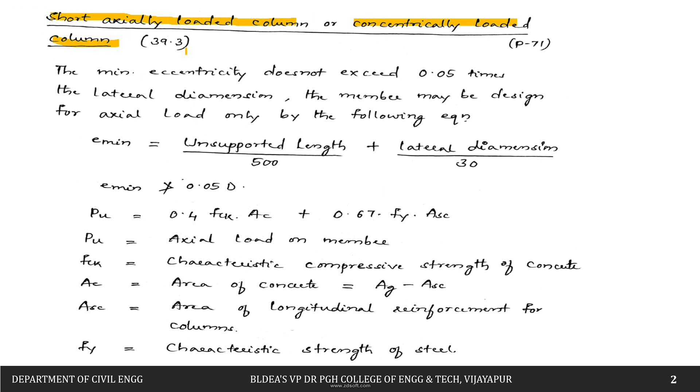So we have to check whether it is a short column or long column, that is L by D ratio. If it is less than 12, we can design it as a short column.

Next we have to check whether it is axially loaded with uniaxial or biaxial bending, or whether it is purely axially loaded. So we have to check that the minimum eccentricity should not exceed 0.05 times the lateral dimensions, that is, E minimum should not be greater than or equal to 0.05 times D. This is what the code says regarding minimum eccentricity.

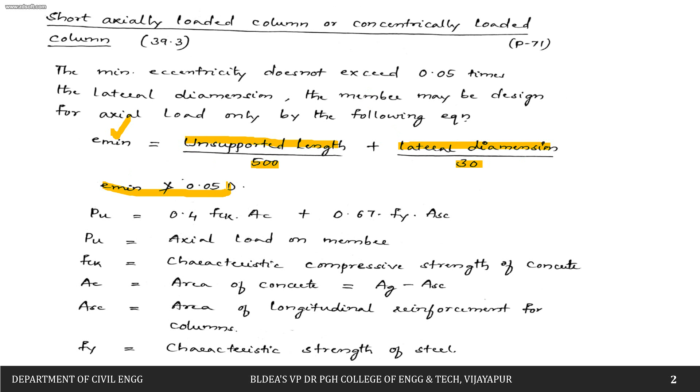So this E minimum is calculated using the formula: unsupported length L by 500, plus lateral dimension by 30. If this is satisfying the criteria, then we can design it as a short axially loaded column.

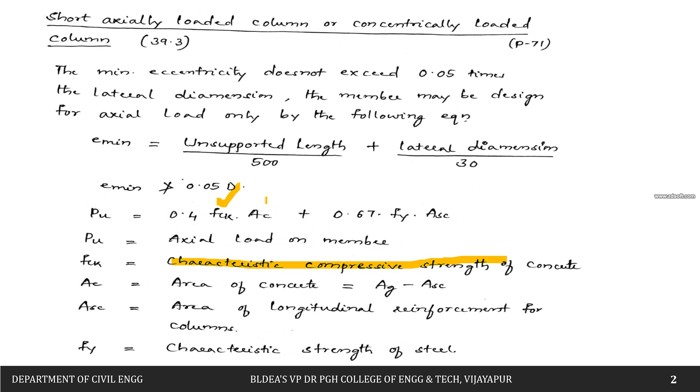So now this is the equation we are going to use to design a column: PU is equal to 0.4 FCK into AC plus 0.67 FY into ASC. So PU is nothing but the axial load on the column. FCK is the characteristic compressive strength of concrete. AC is nothing but the area of concrete.

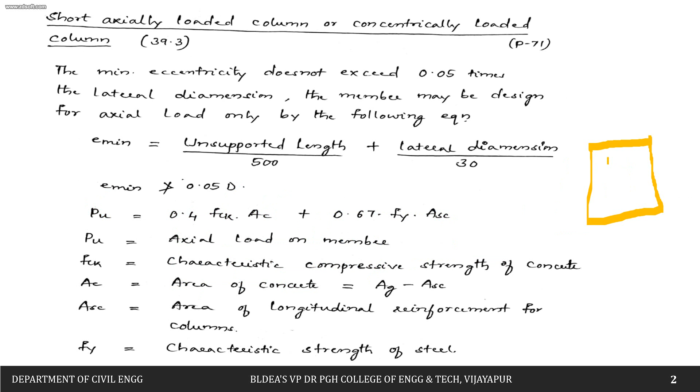So what happens is, if you see this concrete column, I am showing you the cross section. Here we are going to provide the reinforcement. So this has to be deducted, and the value we get will be the area of concrete.

So how do we calculate AC? That is nothing but the gross area minus the area of steel. ASC is nothing but the area of longitudinal reinforcement for the column, and FY is nothing but the characteristic strength of steel.

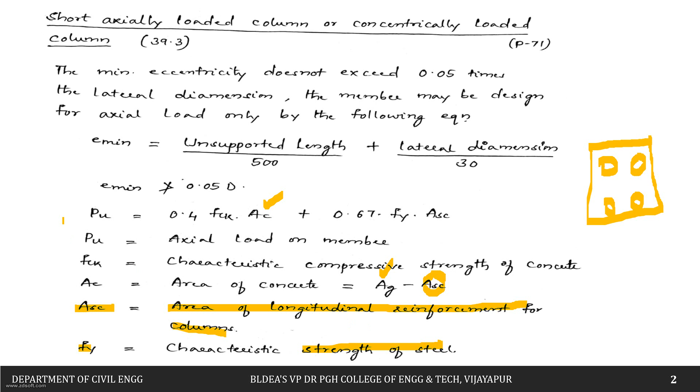So with the help of this formula, we are going to design a short axially loaded column. So let us try to solve one problem.

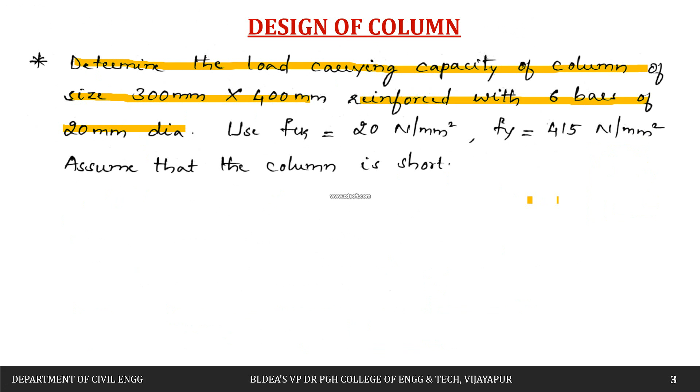Determine the load carrying capacity of a column of size 300 by 400, reinforced with 6 bars of 20 mm diameter. So they have given one column of size 300 by 400. For example, this is 300 and this is 400.

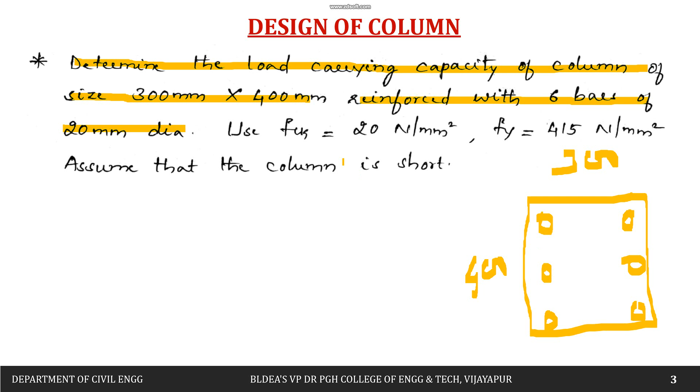In this column there are 6 bars of 20 mm diameter. This is bar 1, 2, 3, 4, 5 and 6. Like this, size is 300 by 400, and in between there are 6 bars provided. Grade of concrete is FCK equal to 20 and FY equal to 415.

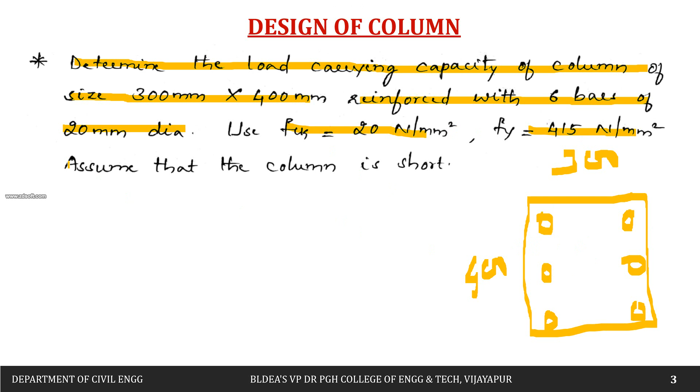So if this is the section and this is the reinforcement, what is its load carrying capacity? That means how much load this column can take. Assume that the column is short. So let us try to solve this problem now.

First let us calculate the area of steel. They have given 6 bars of 20 mm diameter. So pi by 4 into d square, this is nothing but the area of 1 bar, multiplied by 6, gives us the total area of steel, which comes out to be 1884 mm square.

Next is the gross area of the column. They have given size of the column as 300 by 400. If you multiply, we get the gross area of the column, that is 120000 mm square. Then we can calculate the area of concrete, that is gross area minus area of steel, which comes out to be 118116 mm square. This is nothing but the area of concrete.

Then next we can use this formula to design the short axially loaded column, that is PU is equal to 0.4 FCK into AC plus 0.67 FY into ASC. So FCK is 20, AC is just now we have calculated, plus FY is 415, AS is 1884.

So load Pu comes out to be 1468.77, this will be the factored load. If you want to calculate the safe load coming on the column, you have to divide it by the factor of safety, that is 1.5. So 1468.77 divided by 1.5 gives us 979 kilonewton. This will be the load carrying capacity of the column.

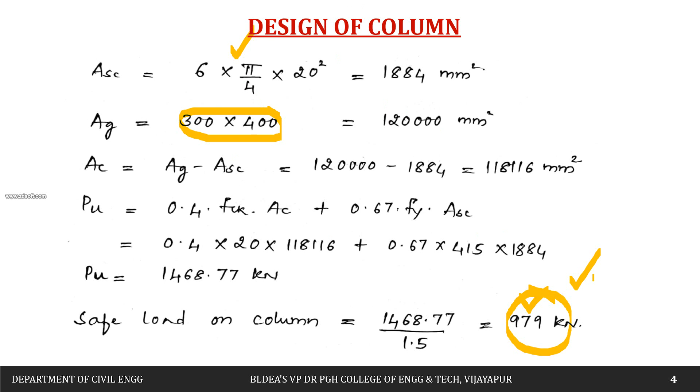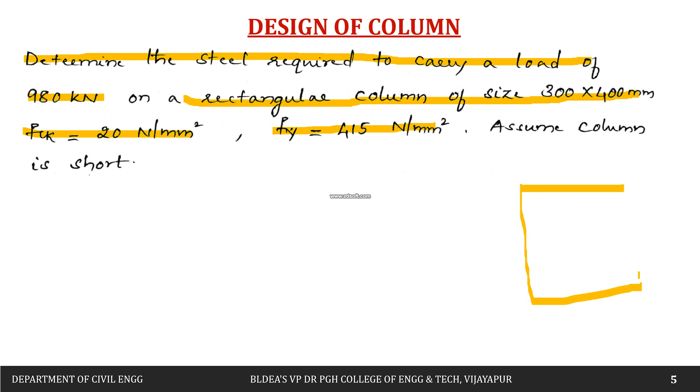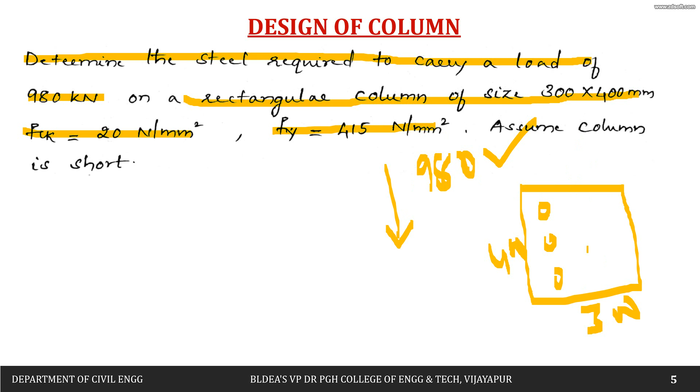Then next, let us try to see this problem. Determine the steel required to carry a load of 980 kilonewton on a rectangular column of size 300 by 400. FCK is 20 and Fy is 415. So here we have one column of size 300 by 400, and the load coming on this is 980 kilonewtons. So what is the steel required, means how much steel I have to put in this column. We have to calculate this.

Assume the column is short. So this is the equation: Pu is equal to 0.4 FCK into AC plus 0.67 Fy into ASC.

So load is given as 980. We will make it as a factored load, that is 1.5 multiplied by 980 into 10 raised to 3. The next is 0.4 FCK is 20. Next is AC, area of concrete, which is gross area minus area of steel. Gross area is 300 by 400, the size of the column, minus area of steel, ASC, which is what we have to calculate. So we'll keep it as it is, plus 0.67 into Fy which is 415, into ASC, the area of steel which we have to calculate.

So this is one equation with one unknown. If you simplify this, we get the answer as 1888.5 mm square. That means this much area of steel is required.

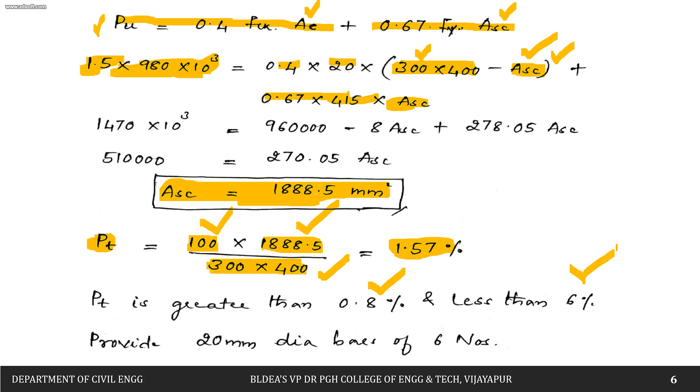Let us try to check what is the percentage of steel. How do you calculate it? Total area of steel required divided by the gross area, that is 300 by 400, multiplied by 100. This gives us the percentage of steel, which comes out to be 1.57 percentage, which is greater than 0.8 percentage as well as less than 6 percentage. So this is satisfying the criteria, and we don't have any problem.

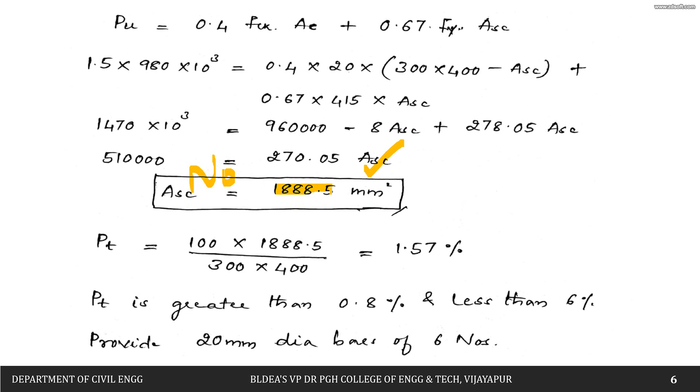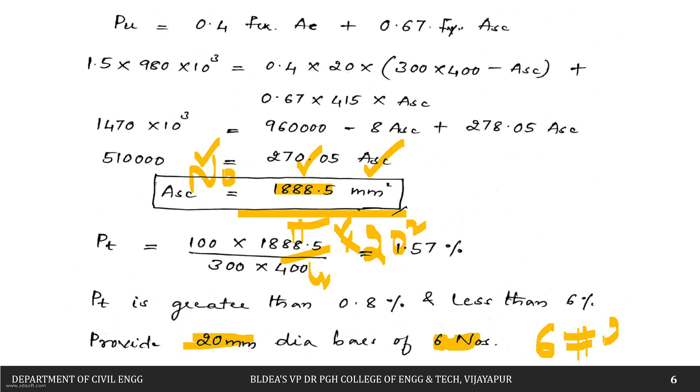So for this area we are going to provide the bars. How can you calculate the number of bars now? Total area required divided by area of one bar. Pi by 4 into, I will use 20 bar, so pi by 4 into 20 square. Total area divided by area of one bar gives us the number, which comes out to be 6 numbers. So we can provide 6 bars of 20 dia.

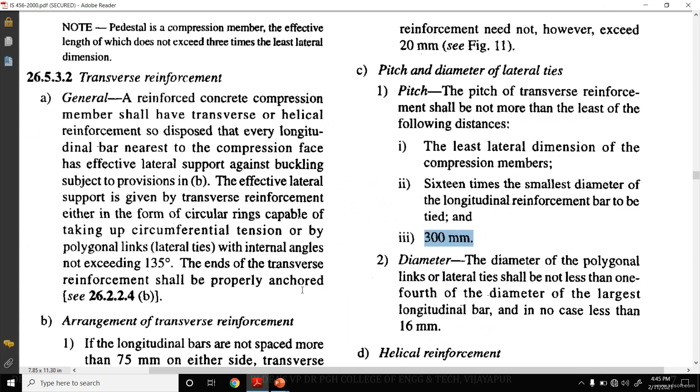So column size they have given is 400 by 400, unsupported length is 3 meters, and axial load of 2300 kilonewton. Next we have to calculate the effective length. To calculate this effective length, we can use the code book, where they have given the effective length in a table at the end. This is the effective length calculation. Here, ours is both ends pinned, so we have to refer to this table.

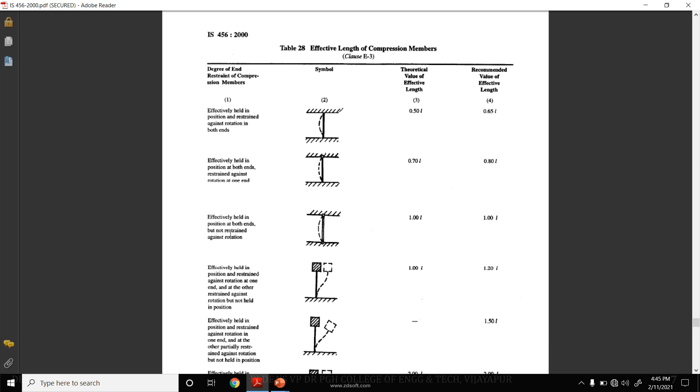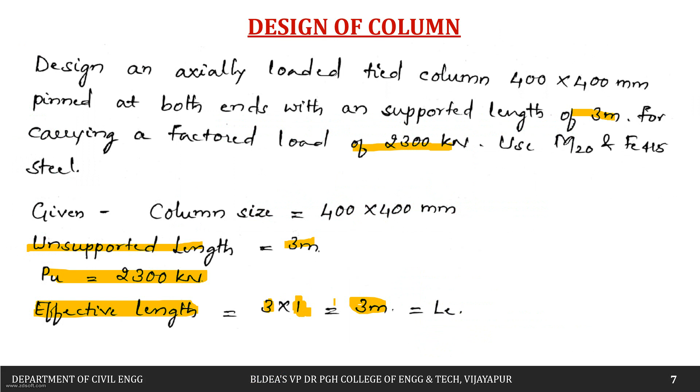So both ends pinned means this case is effectively held in position at both ends but not restrained against rotation. Both ends are pinned, held in position but not restrained against rotation. So therefore it will be 1L, that is unsupported length. Length is 3 multiplied by coefficient 1, so 3 multiplied by 1 equals 3 meters. This will be the effective length of the column.

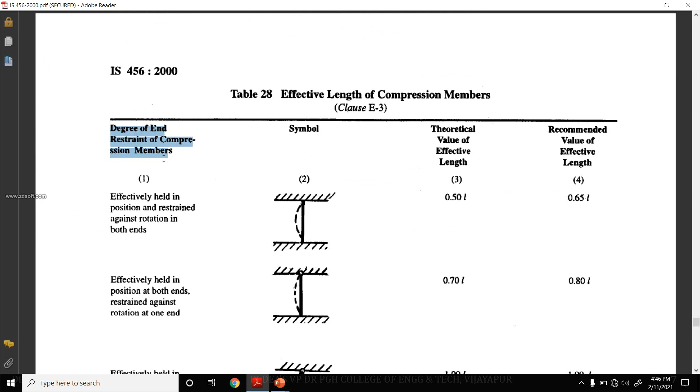So if different degrees of end restraint of compression members are given, accordingly we have to use this coefficient to calculate the effective length of the columns.

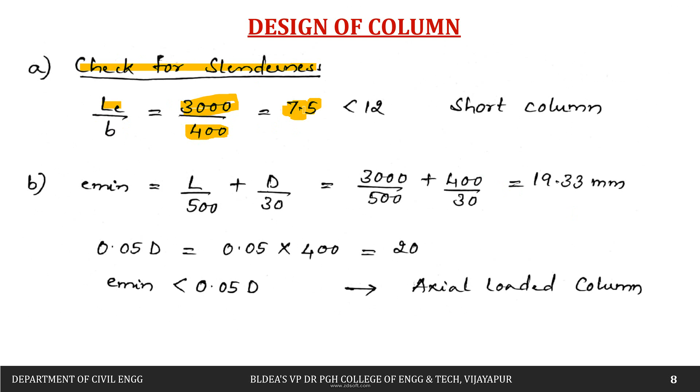Then next we have to check for the slenderness ratio, L by D and L by B ratio. L is 3000, just calculated, divided by 400, as it is a square column of size 400. So 3000 by 400 comes out to be 7.5, which is less than 12. So this ratio is less than 12, therefore we are going to design it as a short column.

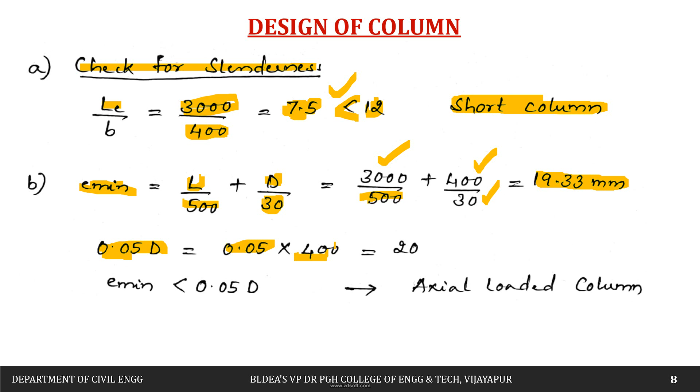Then next we calculate the minimum eccentricity: L divided by 500 plus D divided by 30. L is the effective length 3 divided by 500 plus D is 400 divided by 30, which comes out to be 19.33. This should not be greater than 0.05 times D. 0.05 times D is 400, which comes out to be 20. So 19.33 is less than 0.05D, therefore this can be designed as an axially loaded column.

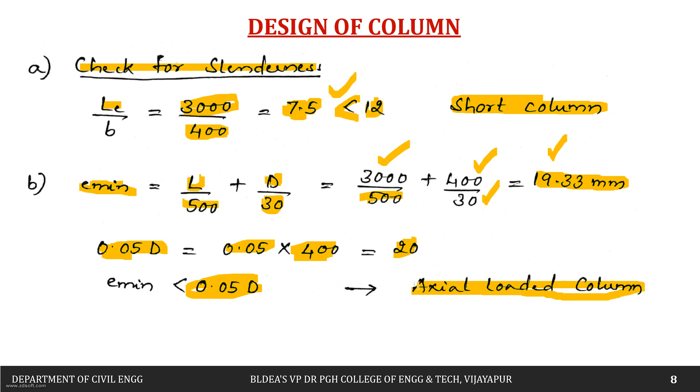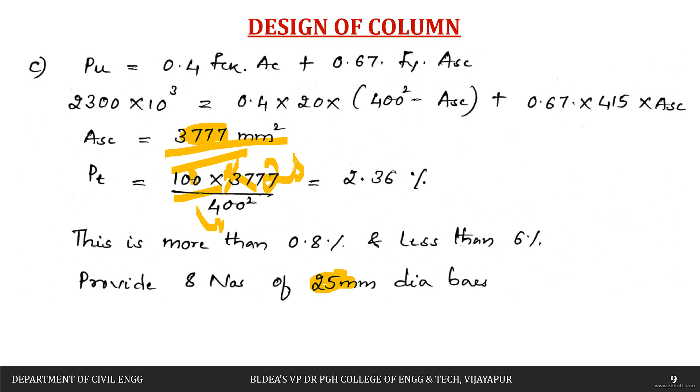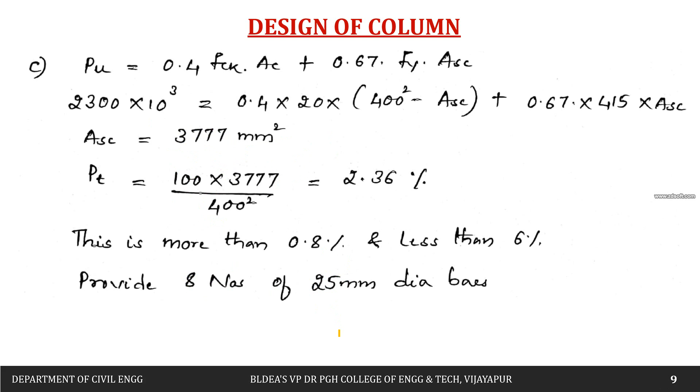So we can provide the number of bars. Let us assume 25 mm dia. So AS is 3777 divided by pi by 4 into 25 square. If you calculate pi by 4 into 25 square, we get approximately 8 numbers. Always remember, we try to provide an even number of bars - 4 bars, 6 bars, 8 bars, in that way.

Then next comes the transverse steel or ties. One criteria is that the diameter of the ties shall not be less than the largest diameter of the bar divided by 4. So 25 divided by 4 comes out to be 5 mm, or we can say 6 mm. The diameter of the tie shall not be less than 6 mm, or as per calculation 5 mm. So therefore let us use 10 mm dia bar, which is greater than both the 5 mm and the 6 mm criteria.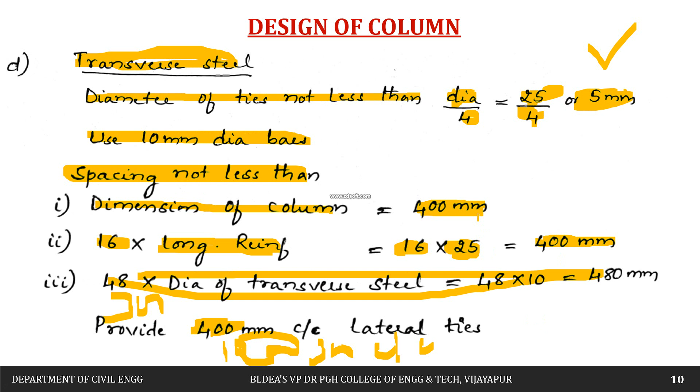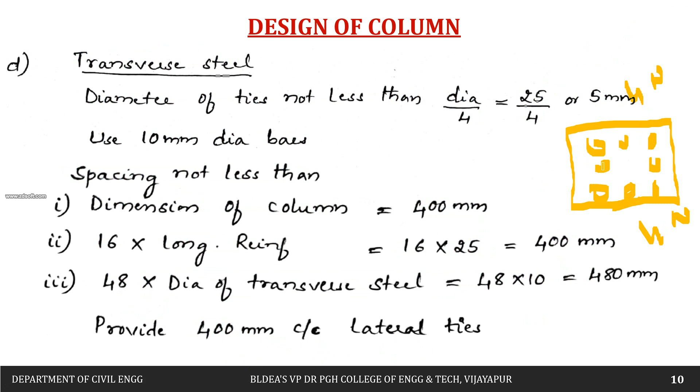At the end you have to show the section. So now we can draw this column. This column size is 400 by 400. So we got 8 bars: 1, 2, 3, 4, 5, 6, 7 and 8. In this way we can provide 8 bars of 25 dia.

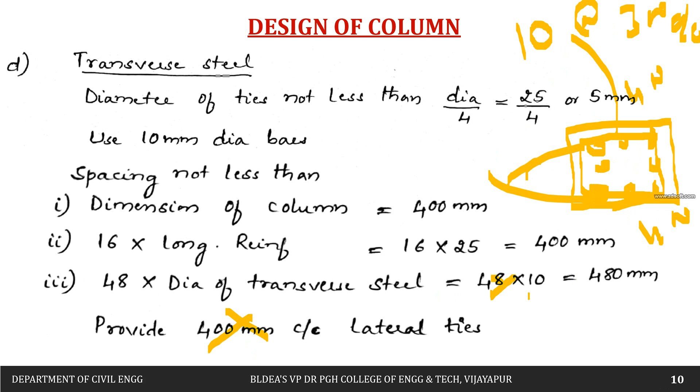This is the cross section, and at the end you have to show these ties. These ties will be 10 dia, provided at 300 mm center to center. So don't take this or this value, minimum is 300. We can provide that.

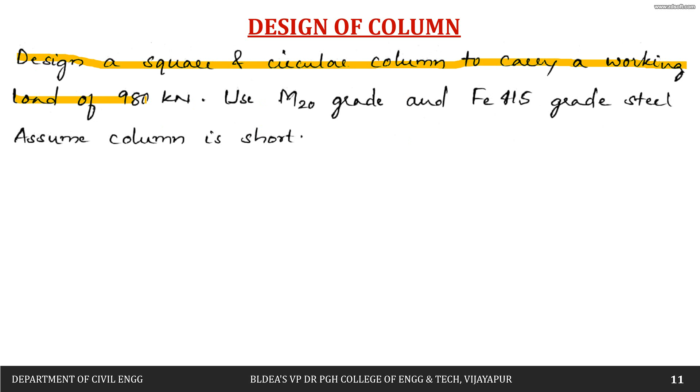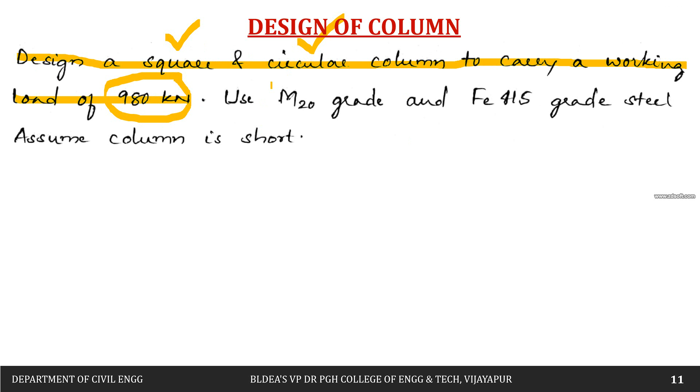Let us try to see this problem. Design a square and circular column to carry a working load of 980 kilonewton. So one load is being given. First we will try to see, if you are going to design it as a square column, what will be the reinforcement required, and also for circular column, what should be the size and reinforcement. Use M20 grade of concrete and Fe415 steel. Assume that the column is short.

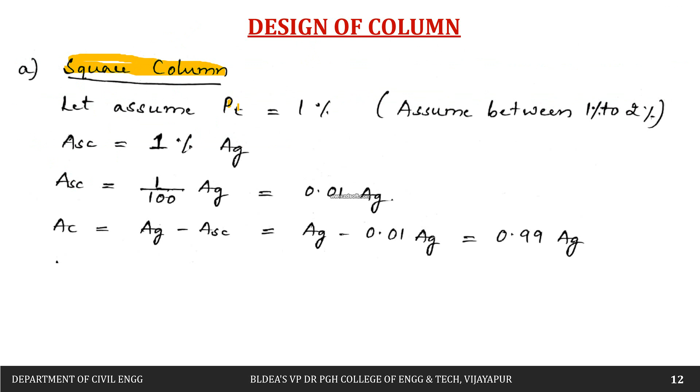Now we'll try to design the first one, that is a square column. Before that we have to assume what percentage of steel. Usually we assume between 1 to 2 percentage. So let us try to assume 1 percentage of steel.

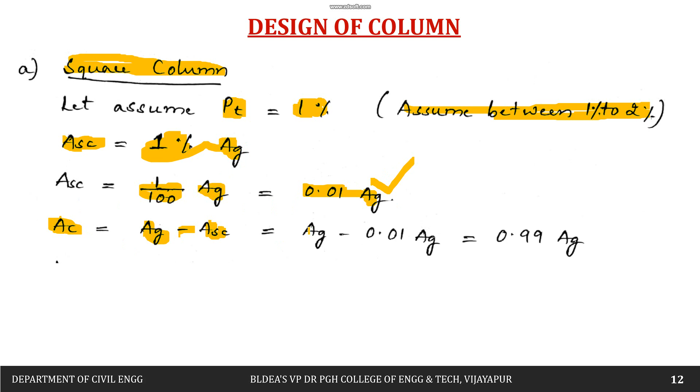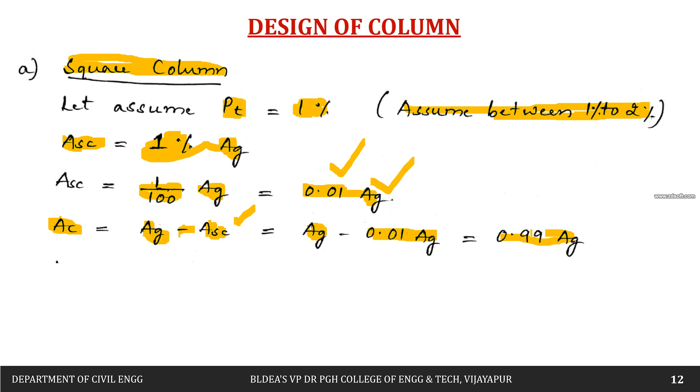Therefore, area of steel, that is 1 percentage of the gross area, will be equal to 1 divided by 100 multiplied by Ag, that is 0.01 Ag, which is nothing but 1 percentage. Next is area of concrete, that will be equal to gross area minus the area of steel. So gross area minus ASC, that is area of steel, which is 1 percentage of gross area, 0.01 Ag. This comes out to be 0.99 times of Ag, which is nothing but the area of concrete.

Next, let us use this equation: Pu is equal to 0.4 FCK AC plus 0.67 Fy into ASC. So Pu is 980 into 10 raised to 3, multiplied by the factor of safety, that is 1.5, equal to 0.4 FCK, which is 20, multiplied by 0.99 Ag, plus 0.67 Fy, which is 415, multiplied by ASC, that is 0.01 times of Ag. So Ag comes out to be 137376 mm square.

So this is nothing but the total area required. As we are designing a square column, both dimensions b and d will remain same. So if you take the square root of this area, we are going to get the size of the column, one side, that is b or d. It comes out to be 370 mm.

But E minimum, as you know, is 20 mm. So based on this also, let us try to check. E minimum is equal to 0.05 times of D. Based on that, let us check. E minimum divided by D, that is 20 divided by 370, comes out to be 0.054, which is greater than 0.05.

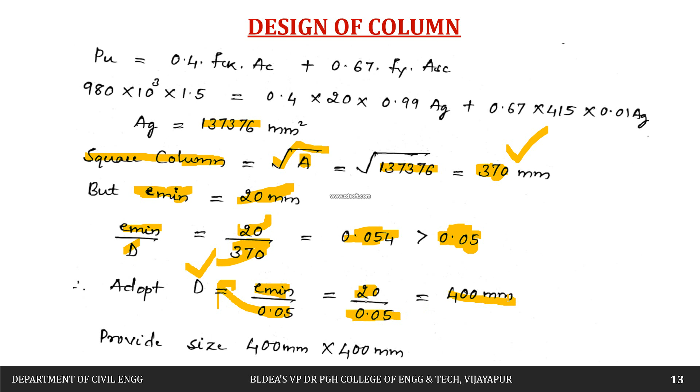So therefore we will not provide 370 mm. Based on the criteria that E minimum should be less than 0.05 times of D, if you cross multiply, as we have already seen, we can calculate the dimension of the column. E minimum divided by 0.05, that is 20 divided by 0.05, comes out to be 400 mm. So therefore we will provide a column of size 400 by 400 mm.

ASC is nothing but area of steel, that is equal to 1 percentage of gross area. So 1 percentage of gross area now, as it is a square column, so dimension is 400 by 400, which comes out to be 1600 mm square. So this much area of steel is required.

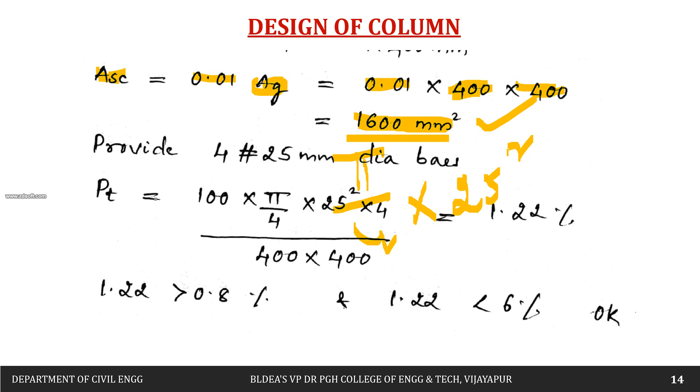Now if you want to calculate the number of bars, you can divide pi by 4 into d square. So you can assume 25 mm bars. Pi by 4 into 25 square, you'll get the number which comes out to be approximately 4. So therefore we can provide 4 bars of 25 dia.

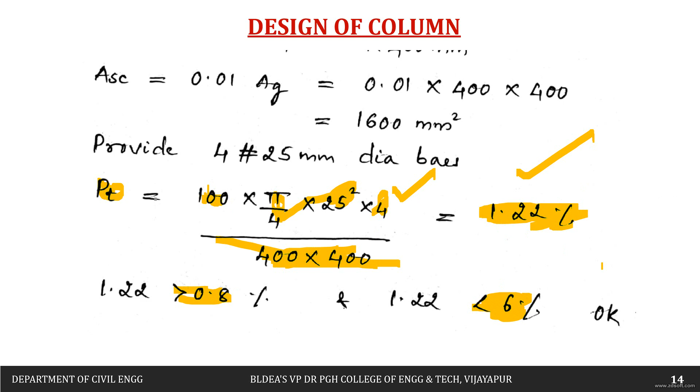And if you calculate the percentage of steel, that is area of 1 bar, that is pi by 4 into 25 square multiplied by 4. This is the total area of steel divided by gross section area, that is 400 by 400, multiplied by 100, which comes out to be 1.22 percentage. So it is greater than 0.8 and less than 6 percentage, so it is satisfying the IS code criteria, no problem.

Then next we go to the transverse steel, lateral ties. Diameter of the bar shall not be less than the largest diameter of the bar divided by 4, which comes out to be 5.5 mm, or 6 mm is the general criteria. So let us try to use 8 mm dia bar. We can use 8 mm or 10 mm.

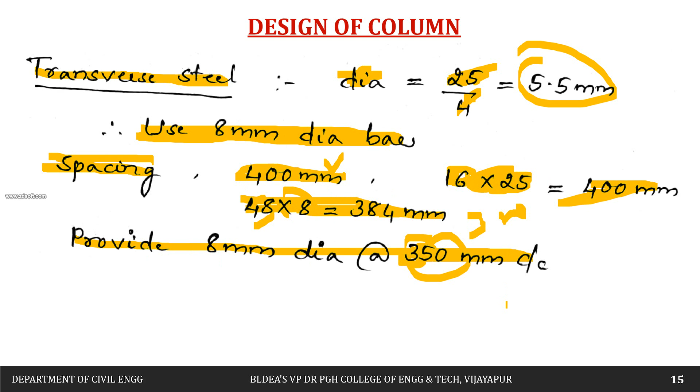Similarly, if you go on designing the circular column, gross area required, already we have calculated. In the previous case, we had done square root of this, so as to get the size of the square column. For a circular column, area will be pi by 4 into d square.

Let us try to calculate this d. So you bring it this side, that is 4 Ag, divided by pi, and then take the square root of this. Based on this, we calculate the diameter. If you substitute here, the diameter comes out to be 418 mm, or you can use 420 mm.

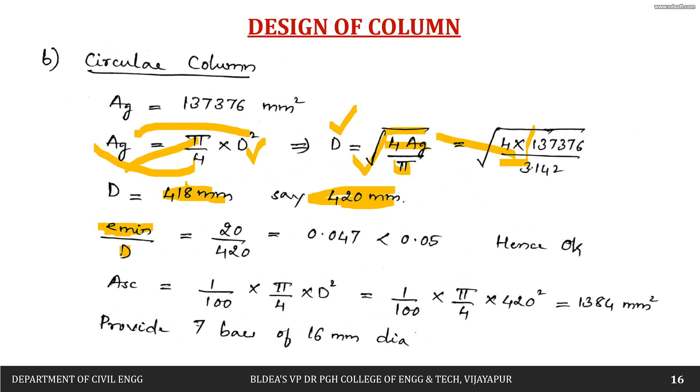Then next, let us try to check minimum eccentricity, E divided by D, that is 20 by 420, which comes out to be 0.047, which is less than 0.05. Hence, okay, we can design it as an axially loaded column.

Then next is area of steel, that is equal to 1% of the area of the column, that is pi by 4 into d square. So d is how much? 420. So pi by 4 into 420 square divided by 100, which comes out to be 1384 mm square.

Based on this, we can calculate the number of bars. We can provide 8 number of bars, don't provide 7 bars. So you can provide 16 mm bars. If you use 1384 divided by pi by 4 into 16 square, it comes out to be approximately 6 point something, so you can provide 8 number of bars, 8 bars of 16 mm dia.

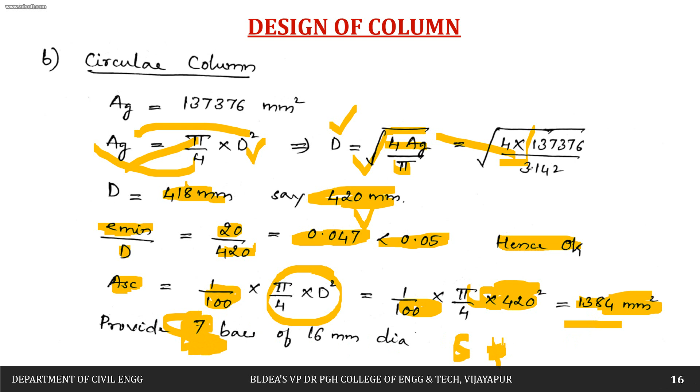Then next is regarding the transverse steel. We have to calculate the diameter of the bar, 1/4 of the diameter of the bar, that is 4 mm or 6 mm, whichever is greater. Then next, let us try to use 6 mm dia bars.

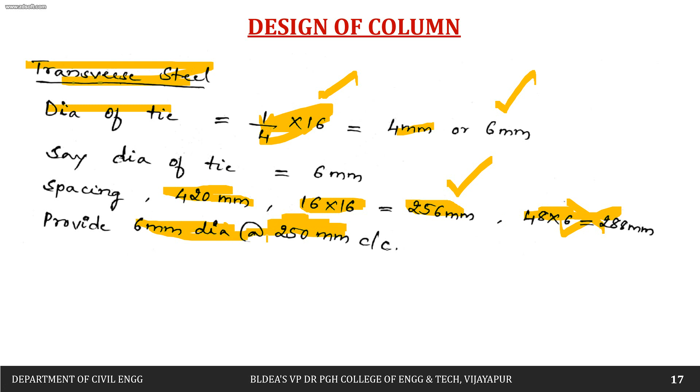First criteria is the dimension of the column, that is 420 mm, or 16 times the diameter of the bar, which comes out to be 256 mm, or 300 mm. We have 300 mm, so you can provide 6 mm dia bars about, we can round it off to a lesser value, that is 250 mm. So we can provide 6 mm dia bars about 250 mm center to center.